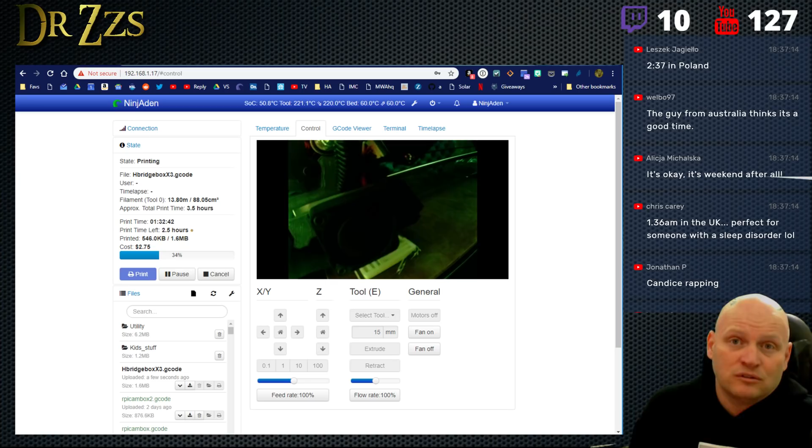Guy from Australia thinks it's a good time. Thank you, Welbo, I'm glad. Candace rapping, that's right, Jonathan knows. I got squirrels in my pants. Okay, it's a weekend after all. Alicja says yes, it is a weekend.

Wish I had the money to throw down on a 3D printer, so many ideas in my head. It's cool, man, it is so cool. I love it all the time.

So what I want to do today too is work on some 3D modeling, since that's been the theme of the last couple of days, everybody's been talking about 3D printers. We've talked about doing a stream about 3D modeling, and it almost doesn't matter what software you use, the principles are a lot the same. So I thought I could do that tonight. We'll start whenever the chat says it's time.

Literally, if you can imagine it, you can build it. That's right, Crazy Editor, it's awesome. So what I'm building here is, I've been working on shades. I got these geared motors, which I think are super cool, very useful, very strong, and yet they just run on 12 volts, and they're so slow you don't have to really vary the speed. You just turn them on and off because they're not very fast.

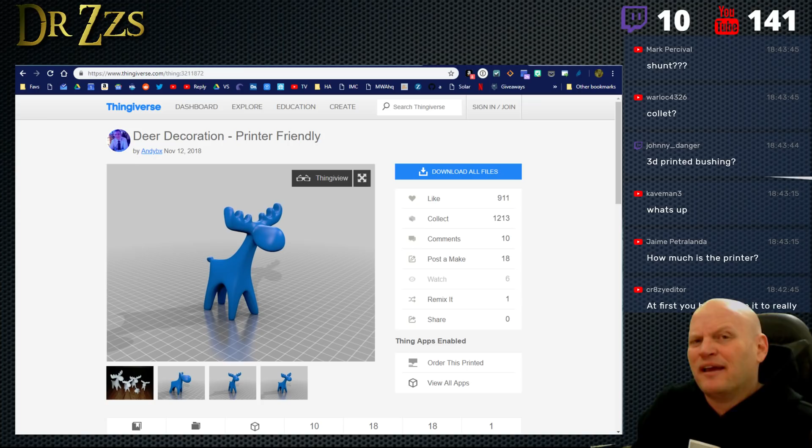How much is the printer? The one for the lottery is, I think, going to be like 170. I think 170, which is sort of a discount, it should be the best price you're going to get. But when we first looked, I think what I put in there first was the Pro, and that was like $230 or $250. Rudy said the best price was going to be like $230, and he asked what I thought about the prices. I said, well, I think that's kind of high, I still want it to be pretty low.

Oh, I wanted to say it. No— oh man, I didn't get to hear it. Thank you for the super chat, darn it, I should have turned up the volume. I'm so sorry, thank you for the super chat though, that was really awesome, appreciate that.

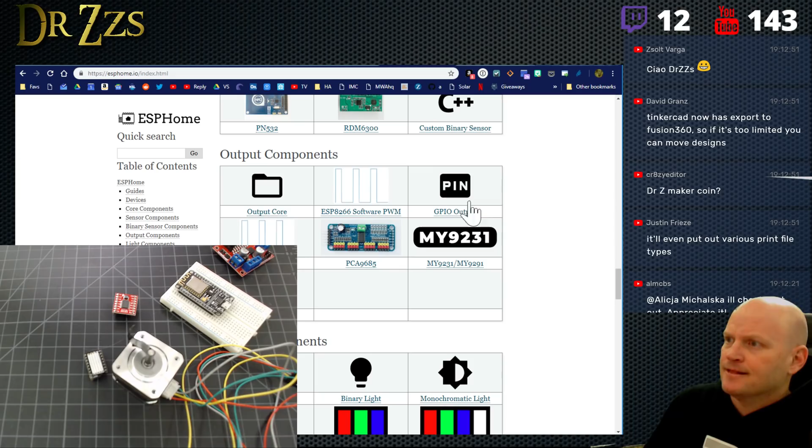So where are we at? Somewhere down here. Cover sensors, miscellaneous, so stepper. Yeah, okay, it's this one. The A4988 is the chip that's on this little guy right here. So ESP Home has a nice built-in back-end driver, Arduino stuff, so that you can run a stepper motor with one of these guys with ESP Home, pretty simply done. So maybe we can model out something for that.

You know what else I have? I know Hookup Rob's been talking about doing blinds, motorized blinds. Oh dear.

So I've got here some blinds. These came off of a door downstairs that we didn't want them on, so I brought them up here so I could start taking them apart and work on essentially putting this stepper in here. Oh, it's going to fit perfectly. Yeah, that's awesome, that'll be great. So maybe what we can work on modeling would be fitting this motor, I want some kind of a mount probably to put this motor in here, and a pulley on it, and some of those kinds of things. So let's put this over here.

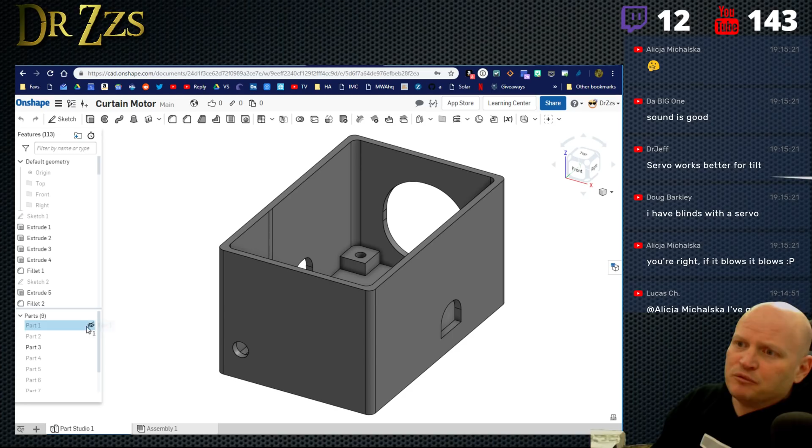Let's move this for a second again. So here's the parts that are included here. There's a few, some of them I'm not going to use, some of them I changed and made better. But if you wanted to print these out, maybe I put these holes for buttons, but your buttons are bigger, or you don't want buttons, you can find my sketch in Onshape, copy it, modify it, and print your own. So you don't have to worry about making it exactly like I have it.

The problem with things on Thingiverse is that what they give you is the STL file. Some will give you the ability to edit it another way, maybe a link to TinkerCad or something, but for the most part it's going to be an STL file. And editing STL files is nigh impossible, kind of a pain in the butt. You can do it with something like the Google one, SketchUp, but it doesn't work well. Google SketchUp takes your 3D model and breaks it into a bunch of lines, actual lines, in 3 dimensions, but just lines. It's no longer a shape that the computer can think about and model. Sorry, shouldn't have said that word, it's the C word around here. So anyways, I'm not sure about that. Okay, blah blah, sorry.

Yeah, servo works better for tilt. Yep, I have servos that I'll probably use for the tilt. But I want them to go up and down, so I need this to spin in one direction a bunch of times and be able to pull pretty hard, then spin the other direction so it'll let it back down again. So that's what I'm going to do.

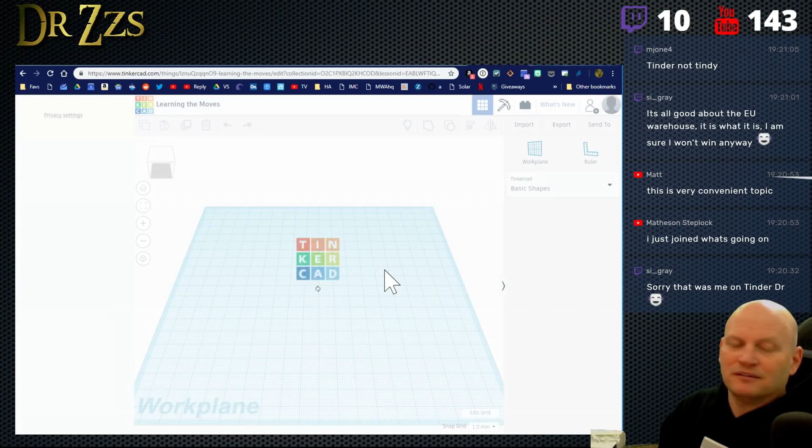Okay, let's go. I don't want to know, I don't want to know how to do anything, I just want to jump in. Just going to delete these things, whatever they are.

Okay, so let's start by saying, okay, what I'm going to need, I think, is going to be a holder for the motor. So the motor is going to fit in there, going to sit in there like that, and it's gonna twist, so it's going to have the tendency to want to do this, right?

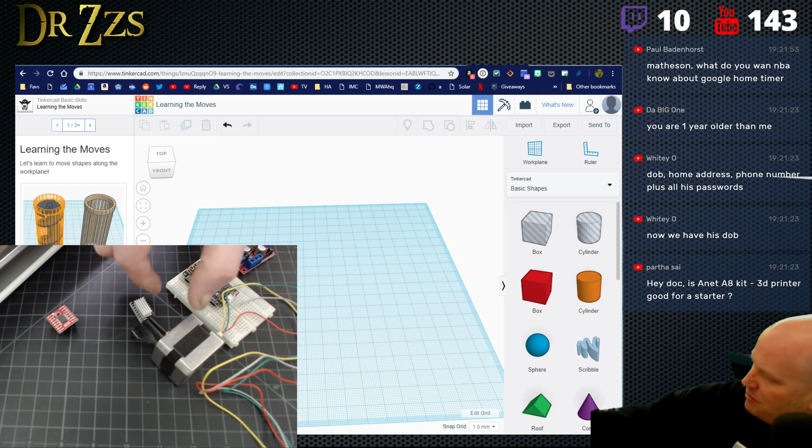So it's got some screw holes here, so that's good - I can put some, these look like M4 screws maybe. So I can put screws here, but what I'm going to want is probably something that will go between this and the front of the blinds here. So if I put that in like that, let's see if I can show you.

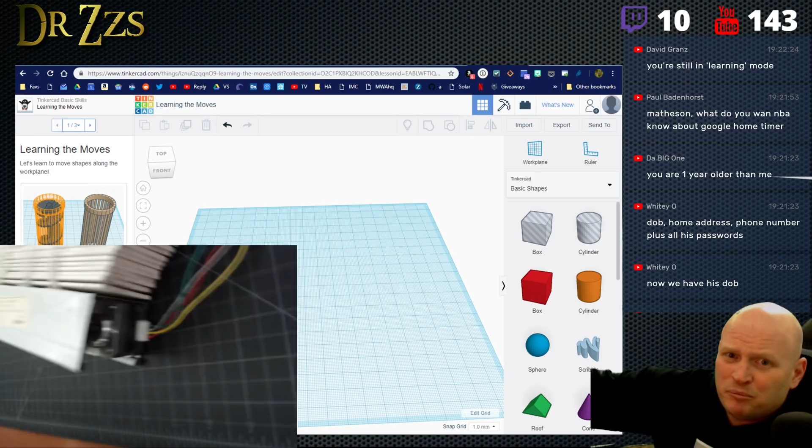So I'm going to put it in there, something like that. Okay, it'll be back a little further, but that's kind of how it's going to sit. So probably a couple things that I'm going to need to model.

One is going to be a pulley for the end, to put the string through and have it wind onto the pulley. The shaft doesn't have a flat side, so it'll just have to press fit really tight on there. Then I want to make something that goes from one side of this to the other, fits in there tight, so it'll have holes so I can put screws all the way through and use them to hold that down.

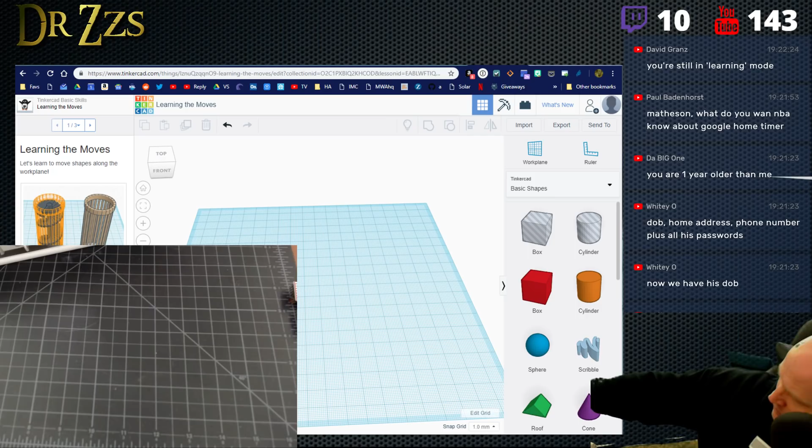The other thing I'm going to need is to put the D1 Mini and this motor controller in there.

Usually when I'm modeling, what I do is pick a plane. All right, I did that. Now I want to use - okay, this is already different. Congratulations, I'm done with the tutorial. Oh, that was all the lesson. Camera controls, look around, okay blah. It's making me do this. Gosh.

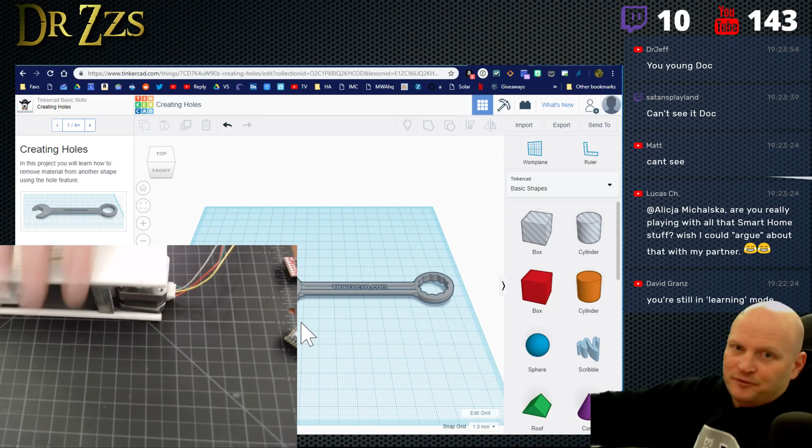Oh yeah, that's actually decent, you can see that. So this right here, there it is. Where you see my finger blocking, that's where the string comes up. And this little thing right here is the lock, so when you pull on it sideways to release it, that's the lock.

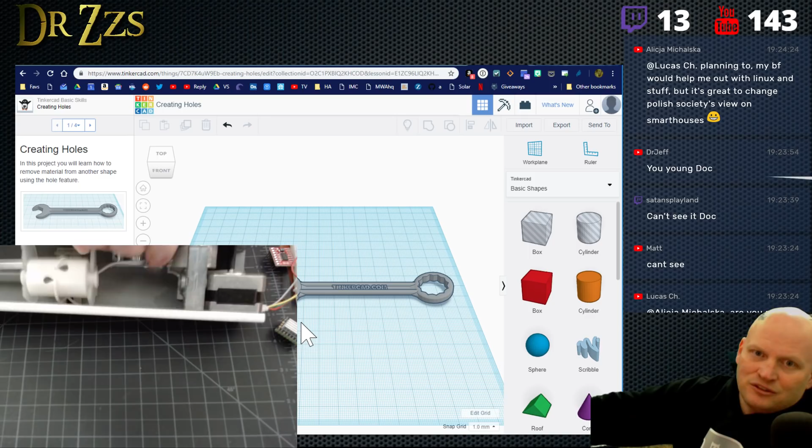So what I've got to do is take that lock out, and then this string that's coming across right here is going to be what wraps around the shaft of the motor. The motor is actually going to fit in right here. It doesn't fit this way - I'm going to have to take this bracket off and slide it in there, or shorten the shaft. I guess I could cut the shaft off, but I don't want to do that.

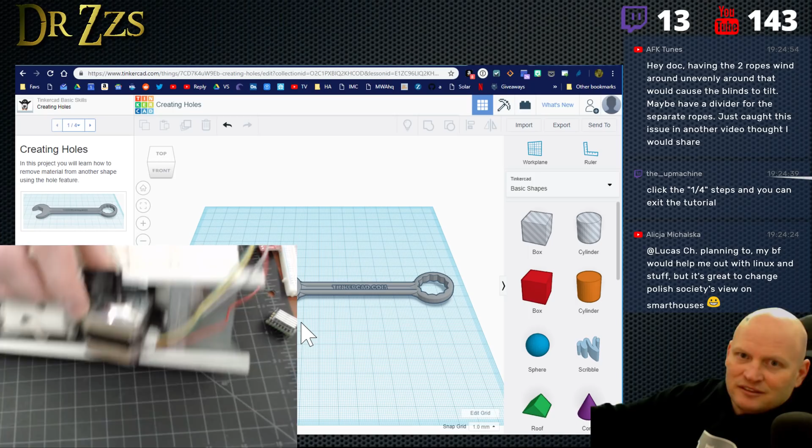But it's going to fit in right there. Come on, get closer, it's going to fit in there. Every time I do that it wants to go away. There we go, okay, so it's going to fit in like that, and then it'll spool around this shaft. And then I'll probably put the other parts over here.

So one thing maybe we can start with - oh yeah, that's a good idea, because that'll be easy - I'll build a cap for the end of this, and in that cap will be the motor controller and the D1 Mini. That'll be easy, and it'll give us a chance to try out Tinkercad.

What do you think? Blah blah blah. Yeah, copy, paste, scale. Okay. Should be paying attention to that, but I'm not.

Let's see - having the two ropes wind around unevenly would cause the blinds to tilt. Maybe have a divider for separate ropes. Just caught this issue in another video, thought I'd share. Oh, awesome, okay, perfect, that's great, thank you. But they can go at the same speed. Yeah, okay, that's great, oh I love it.

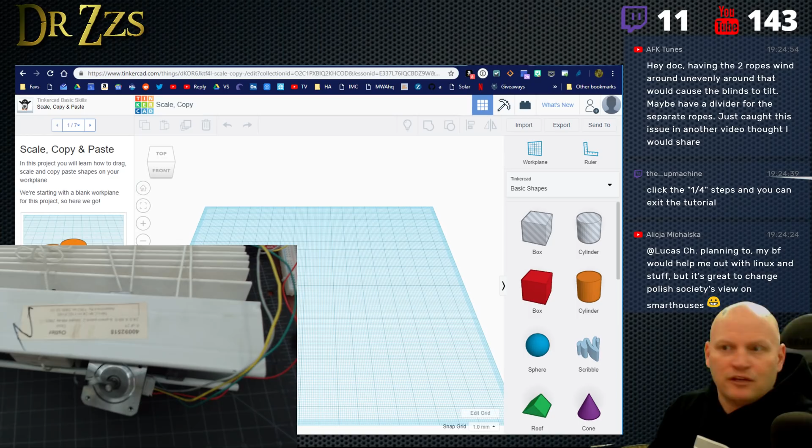Click the quarter steps and you can get - I can exit the tutorial. Exit. Oh good, because gosh it was going to take forever. Okay.

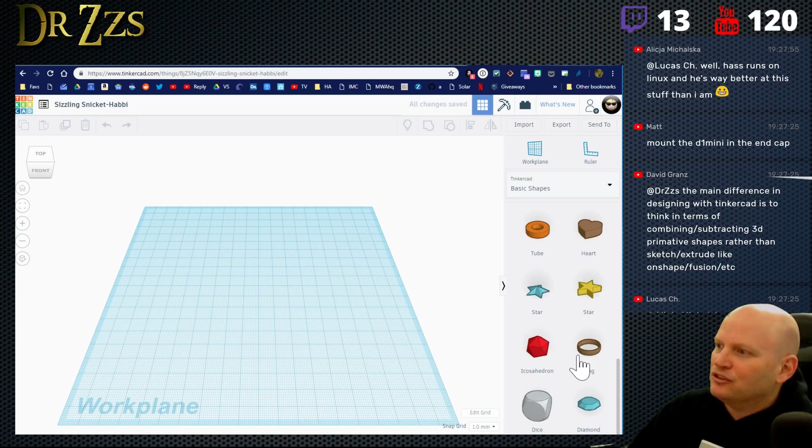Okay, create a new design. So what I'm used to doing, I guess this is interesting. So these, you start with a shape. That's different. What I usually did...

Interesting, okay, so I guess I'm going to want a box. Steps, length, height, width. Okay. Interesting. And then I guess I could probably cut out the box at some point. Group, ungroup, align, flip. Blocks and bricks? Really? You can make stuff out of Legos? Oh, that's cool. All right, so the other thing you're going to need if you're going to do 3D modeling is you're going to want calipers. I think this is like $10, maybe less.

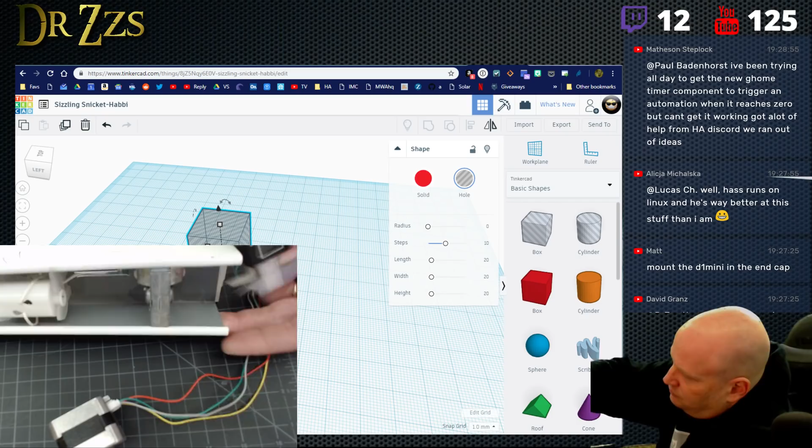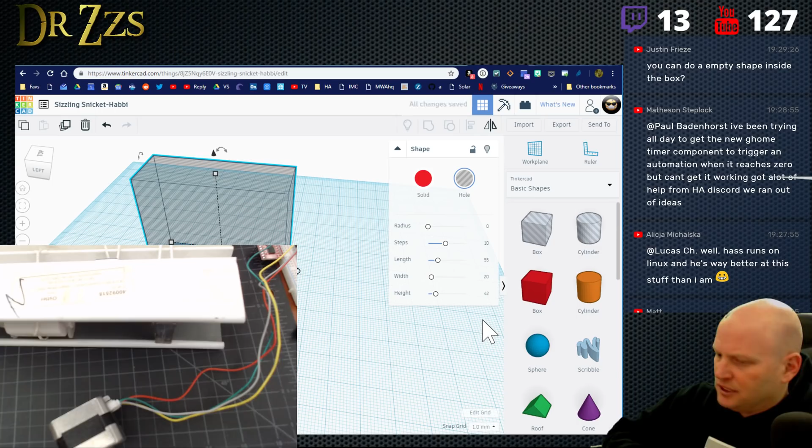So if I'm going to make this fit in the end of this, I got to measure that. All right, 56.72 millimeters, I'm going to say 55. So 55 that way. And then 43.8, so we're going to say 42. So we're going to go 55. And then height is going to be, what did I say, 42? Okay, and then 20 - 20 is probably actually deep enough. Let's see, because we'll have a D1 Mini with some headers. Yeah, 20 will be good. And then this guy with headers. Yeah, maybe we'll make it a little bit bigger. Let's go 30.

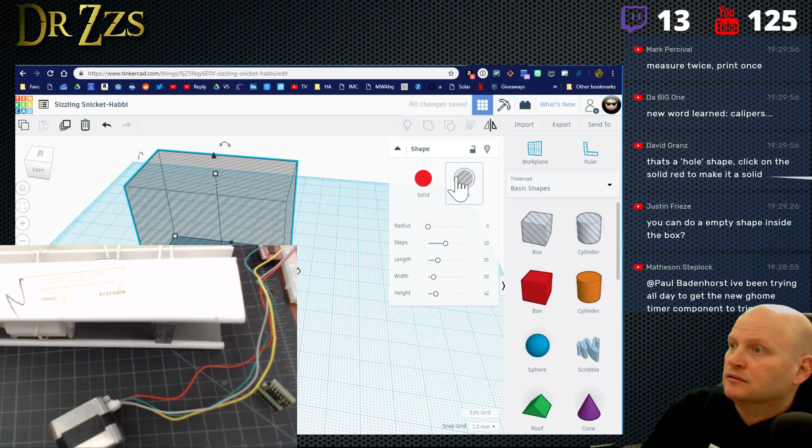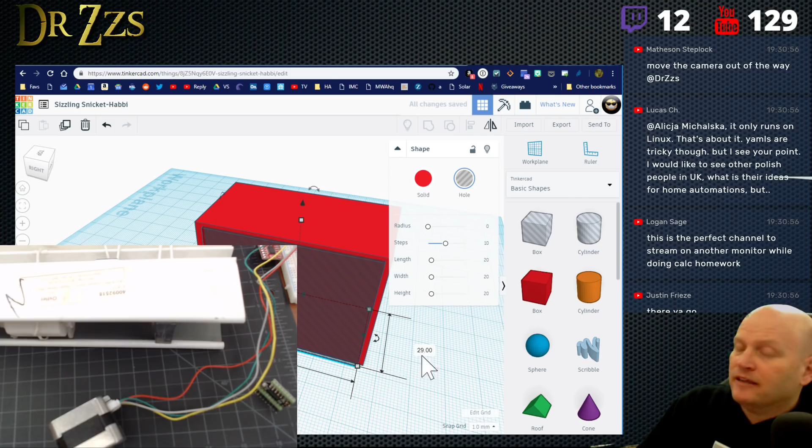Okay, we're going to make it a solid. All right, and now I'm guessing what I want to do is make a box here, and I want to cut out this other box, I guess. Okay, this is cool, I think I'm getting this. And then, oops. Okay, I'm digging it. Uh-oh. Oh, I see what's happening here. I want to go back. Okay, sidewalls are a little thick, make them a little thinner. I like that it snaps right to the - oh, you guys can't see, sorry, move the camera out of the way. Yeah, sorry, where'd my drink go?

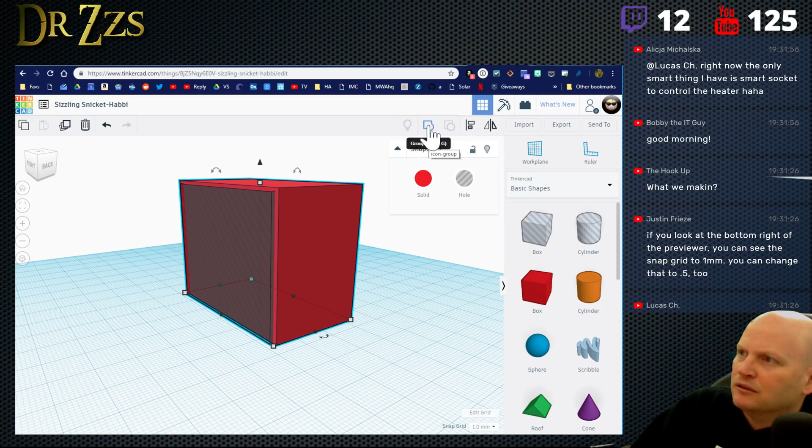You select multiple objects and combine. Okay, oh let's finish the depth part. I guess the depth, probably want it. Yeah. Okay, so then I make that a hole. Is that right? Stayed, okay good. Now I select multiple objects. Duplicate, copy, group, align, show all. No, cancel that, no, where's undo? Okay, workplane ruler, export, what's new?

Do I right click them?

Right now, the only smart thing I have in the house is a smart socket to control the heater. That's good, Alicja, that's fine.

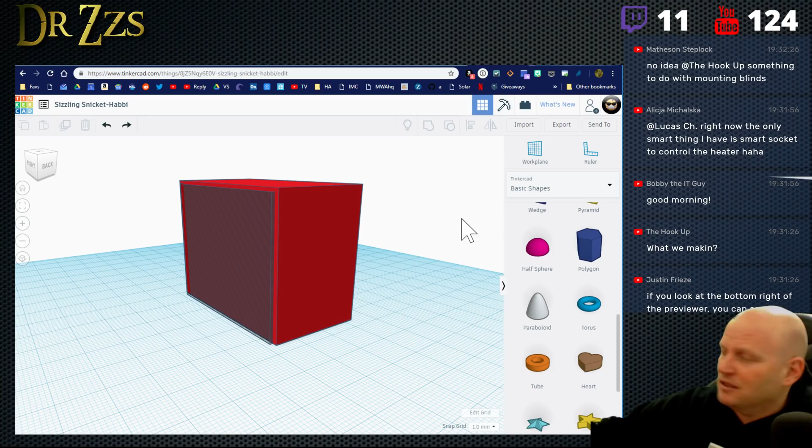You gotta start somewhere. What are we making? Hey Rob, how's it going? We're tinkering around. So you were talking about blinds. I'm working on blinds. This is gonna be - oh, I'm putting it in front of the camera, it's not turned on. But what we're really talking about is a lot of 3D printing stuff. A lot of 3D printing stuff. A lot of talk lately with the giveaway and such.

So this is me learning TinkerCad, which I've never used before. I want this to go up, I don't want it to sit flat on the bottom, I want it to go up. Is that steps maybe? No.

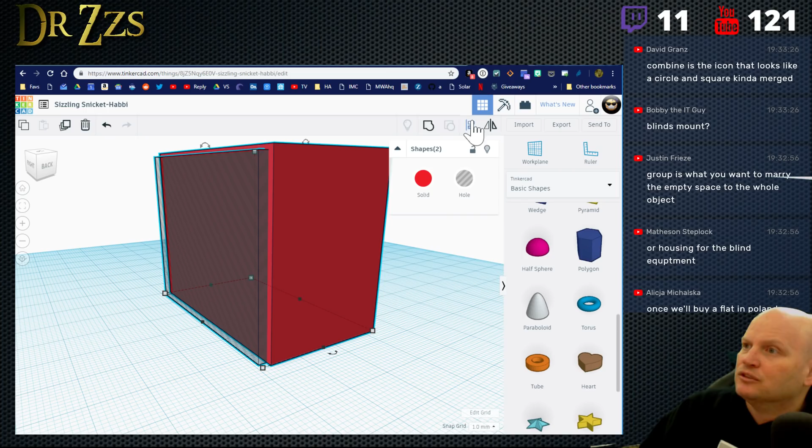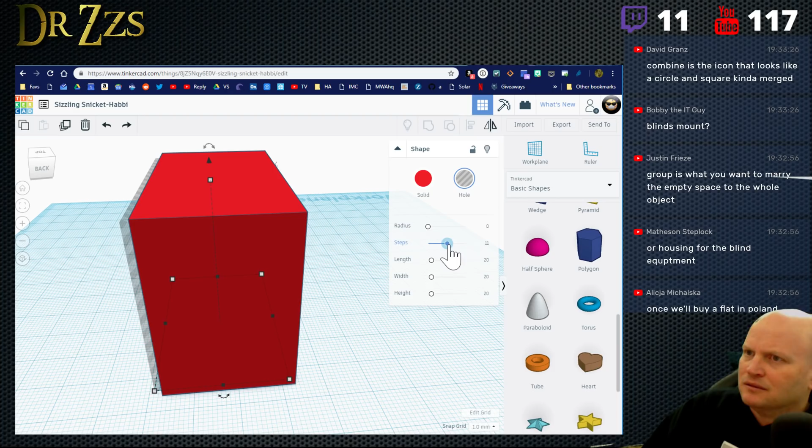Because if I delete it from the inside, if I right click - no, right click. Combine is the icon that looks like a circle, the square kind of, this one. Ah, very good, thank you, that was easy. Except this - see the bottom, there's nothing on the bottom. So I'm going to back up, I got to figure out how to get this up in the air. Radius, steps, length, width, height - what does that do? Oh, I saw it, I saw the arrow that I want, it's up at the top. There, this one. Oh yeah, oh yeah, very good.

Okay, I'm digging this, this has got some good features definitely. I could see this being pretty easy for new users, right? Because you're actually modeling it, you're almost holding it in your hand kind of thing. Okay, and now I can select them both and then hit this, and it will take the hole out. Okay cool, very nice, okay, very nice.

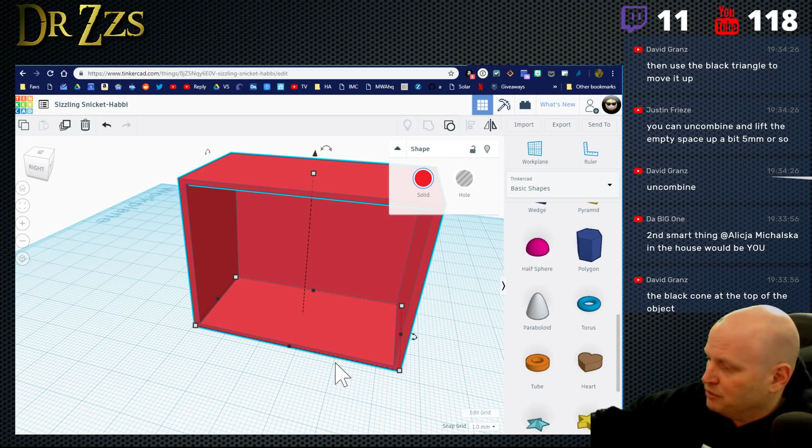All right, now I want to be able to mount the - let's see, well you know what, I'm going to need a hole for wires, so let's put a hole for wires in there. Tube, cylinder, let's do a cylinder. And there, we're going to rotate it this way. Okay, I like this, this is easy. I'm going to shrink it down - it's just going to fit wires through, so we'll make it 5, a little small, we'll make it 6. And then this way, 6, okay. And then, oops...

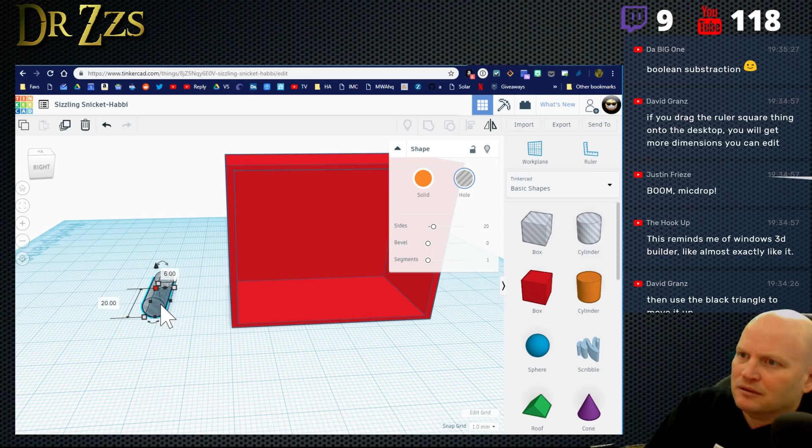6. And then I want to move it though, like in space. I want to move it. There, no, there, no, no. Once I set it here, am I stuck? Boolean subtraction - if you drag the ruler square thing onto the desktop, you get more dimensions.

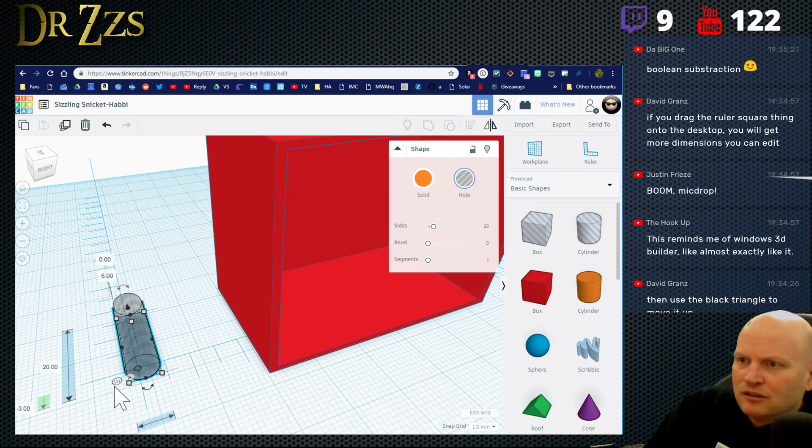Oh, yes you do. Nice. What does this say? Use midpoint. Oh, okay good, so it gives you kind of snaps. Oh that's what that is. Okay cool, I want to move the whole bloomin' thing, the bloomin' onion. Okay, I can move it up in the air. That's good. There's got to be another arrow like that that goes the other direction.

Oh wait, do I rotate it? Yeah, that's probably what I have to do. I'm going to rotate it. And then that arrow - oh, I thought the arrow would go to the other side. How do I move it to the other side? Oh, here we go, this way. Oops, this one. No, this one. No.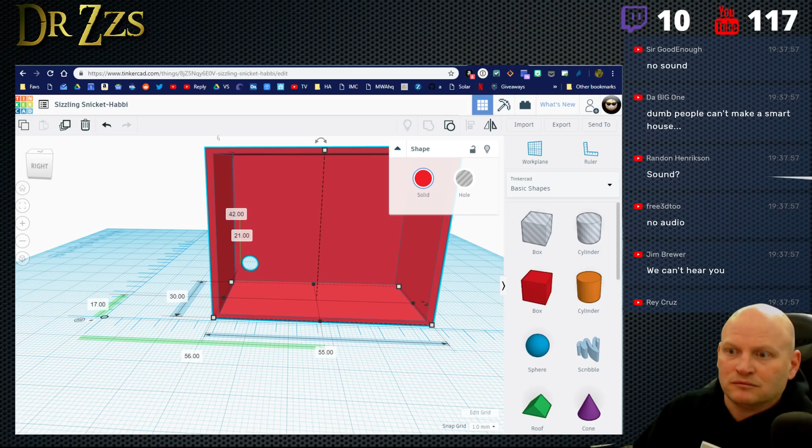How about now? No sound, no sound. Dumb people can't make a smart house. That's me. All right, how long had you lost audio? Because I revealed the secret of life, and I'm sorry you missed it.

Reminds me of Windows 3D Builder. Almost exactly like it, is that right? Maybe what they did was buy it back when it was there.

Super simple, so let me show you for comparison now. Let's do the same thing, let's do it in Onshape. And I think, honestly, now that I've used that a little bit, I think for a new user, TinkerCad - I think I'd probably recommend TinkerCad.

So we're going to make a new document here. We're going to call it blinds cap. Okay.

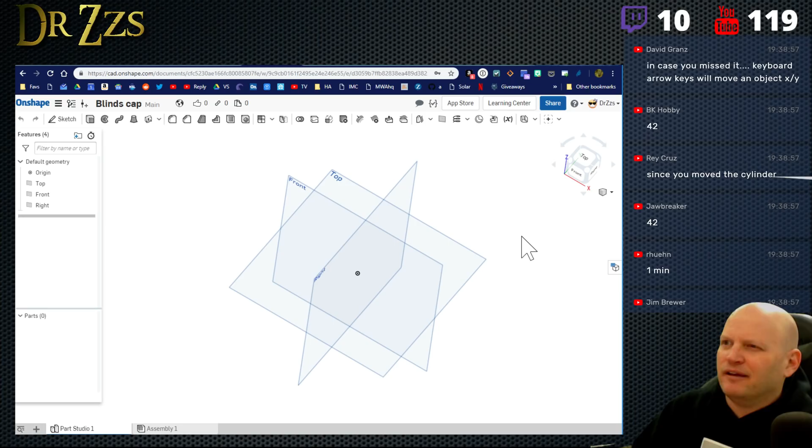So the way this works, and this is at least the way I did things in Fusion 360, you start out with a sketch, which is going to be a 2D, two-dimensional drawing. So I'm going to start out with a sketch, and the sketch is just going to be a basic shape. In this case, I'm going to do a center point rectangle, so I'm going to pick this rectangle and then stretch it out to whatever I want it to be. And then what did I say it was, like 55 by 42, I think I said, right? 55 by 42, okay great. And then that's the outside.

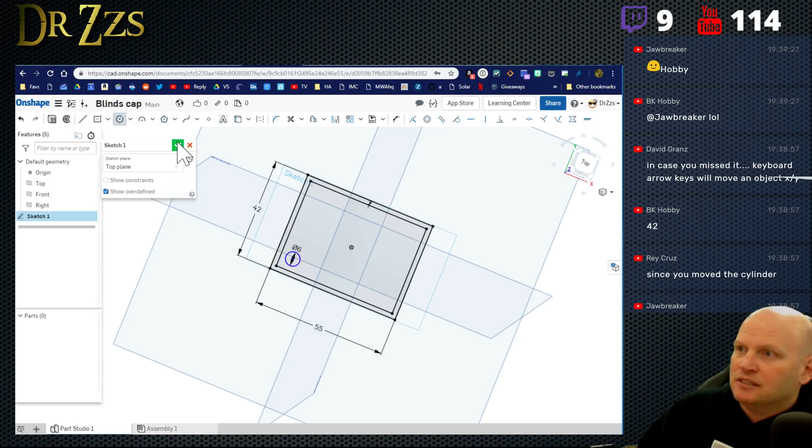So then I want the inside, I want to come in. So I'm going to grab this offset, and I'm going to come in off the offset maybe 2 millimeters. Makes a good thick, good size wall, 2 millimeter wall on the part. Okay, so I come in that far in that. And then I want to put the circle - this doesn't have to be exact, so I'm just going to put a circle right about there. And I'm going to give the circle a 6 millimeter diameter. Okay, done.

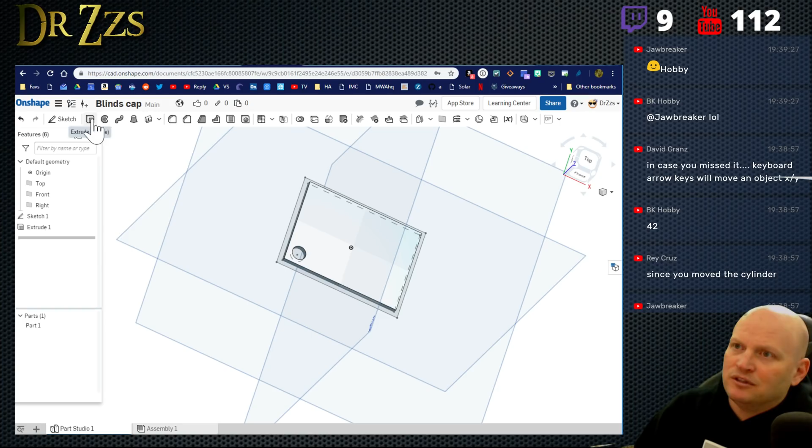Now I'm going to do a couple things. Now I'm going to extrude - extrude means you build it up from flat, so it was 2-dimensional, we're going to make it 3-dimensional. So first we're going to extrude this bottom part, and we're going to make the bottom part also 2 millimeters. Great. Now when you do that, the sketch will disappear, so you have to come over here and turn the sketch back on so you can see it. And then we're going to do another extrude here. And how big did we make that thing? I don't remember what it was. 20? We'll say 25, 25 sounds fine.

So then you extrude it out that way, and you've got some choices here. You can make it new, which would make it a separate part - so this would be one part, this would be a separate part. Or you add it, which is what I want to do. Or in the case of things that overlap, you can remove and erase part of it, like we did with that other box - we removed the box from the inside of the other box. Or you can intersect, where it keeps just the parts where they overlap. In this case, these parts don't overlap, so I can't remove or intersect anything. I'm just going to add it to the regular part.

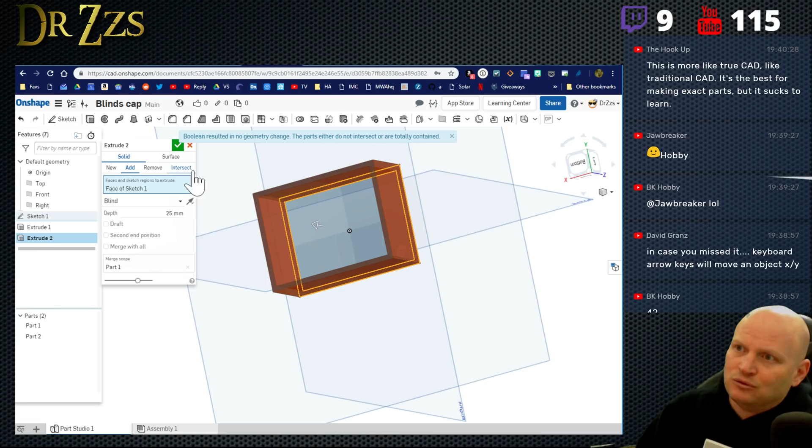Now what's it doing? Now I got it all, now it's all pissed off. Oh, because it's going the wrong direction. There it goes, now it's going the right direction. So this arrow was going that way, and this part stops right here at this line, so it says you can't add it. They don't actually connect other than at this like single point line, so you got to flip it this way.

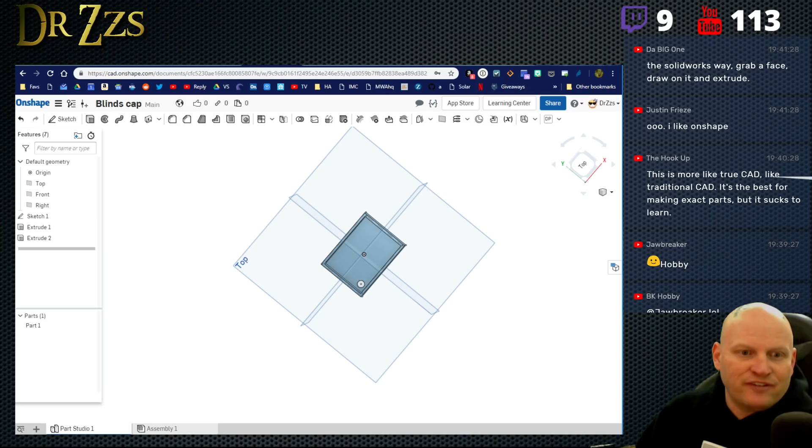Okay, so there you go. That's the same box. That was fast, but that's because I know how to do this a bit better. There's a lot of fumbling around, but the SolidWorks way is: grab a face, draw on it, and extrude. That's how I do Onshape - there may be other ways, but that's how I do it. I like thinking that way. Once you start thinking that way, it makes it pretty easy to make things.

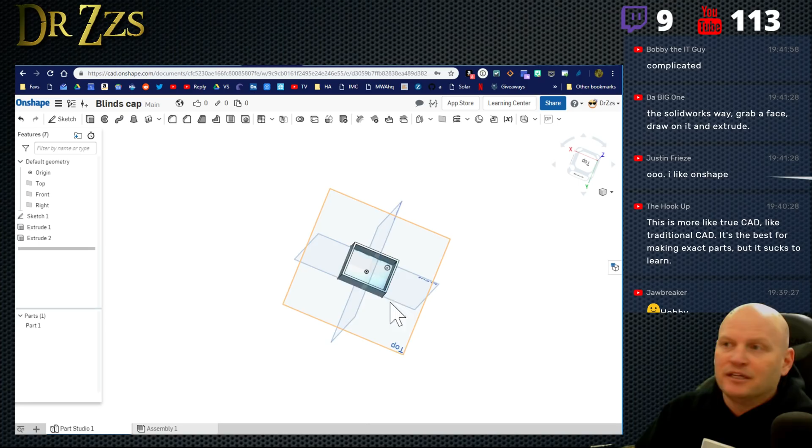This is more like true CAD, traditional CAD, the best for making exact parts, but it sucks to learn. You mean this, Onshape, this thing here? It's hard to learn, I would think. I started doing this kind of stuff in high school.

Does that seem complicated to you, Bobby? Which seems better to you? Probably TinkerCAD. What you need to do is get something in mind and start playing with it, and as soon as you can't figure something out, come ask us and we'll help. The main difference is designing with TinkerCAD is thinking in terms of combining and subtracting 3D primitive shapes, rather than sketch-extrude like Onshape, Fusion, etc. That's what I'm gathering, Dave. So here's something.

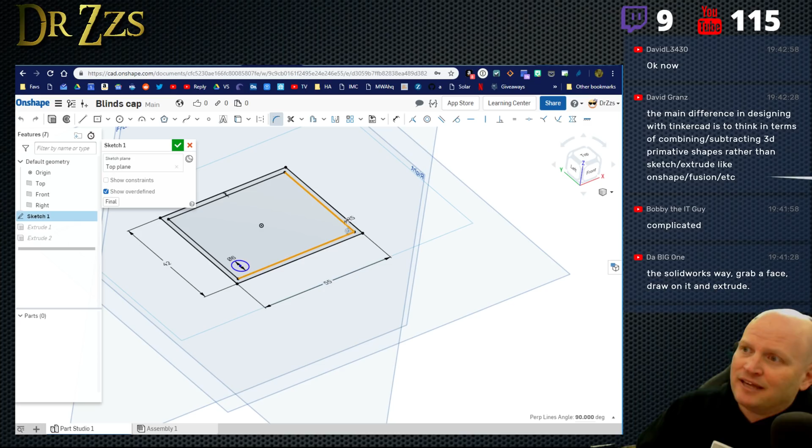Let's do this next piece, because I like to have rounded corners on things. So I want to round the corners. There's a couple ways you can do it in Onshape - you can either go to the sketch and add a fillet to the corners, like that, a 5 millimeter radius fillet. So I could do that. But what I do instead is, once it's already a 3D part, you can fillet it as a solid part, and that just makes it look nice.

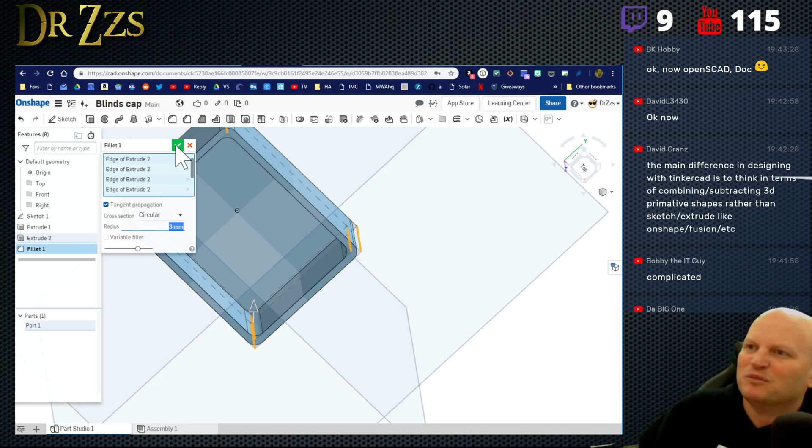Grab that edge, and that - just grab all the edges you want to fillet. We'll fillet the insides as well, make it a 3 millimeter radius. Actually, the inside should probably be a little different to make it true, but whatever, we'll leave it. Okay, so that's how you do it in Onshape.

Now let's go back here - how would you do that in this? Have you seen that 3D printing YouTube dude's video on fillets? I don't think so. Is it funny or is it just really good? Does he talk about how to do it?

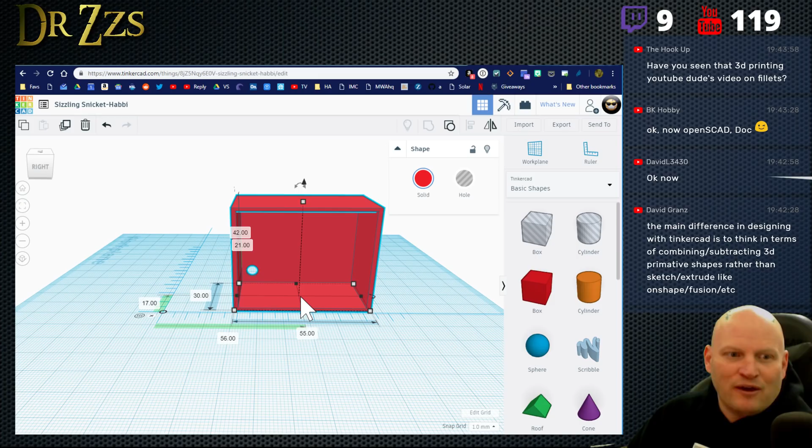Now OpenSCAD. So here's the thing - now how do I make that? How do I make a fillet here? Do I make a tube? I put a tube somewhere.

Rounded corners make the print stronger too, that's right, Da BIG One - that's why we do it. I was talking to a friend who was 3D printing new parts for the RC car he gave his son for his birthday, and we had that exact discussion, because they'd designed the car so that these frame axle joint pieces had square corners, and as soon as you hit something it just snapped. He said if you'd just put an edge on it, a fillet or chamfer, to give it some strength, it would've been fine.

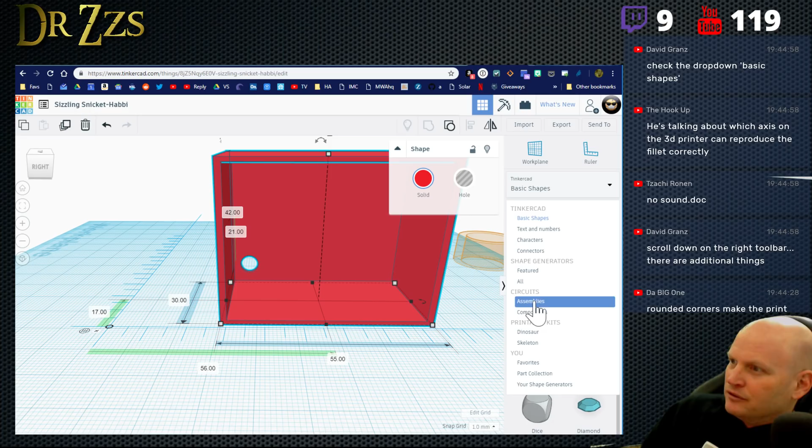Drop down, basic shapes - oh, okay. Connectors, okay. Shape generators, assemblies, components - whoa. Uh-oh. Text and numbers, characters - so is it connectors?

Oh, these are cool, I like this. Oh, spinning hub - no. Oh you see these - this is great that they already have these designs. So in Onshape, you'd either have to go steal somebody else's model, or draw it up yourself. This is pretty nice that they've got these parts already modeled up for you.

So it must not be connectors. Where is it - basic shapes, not text and numbers probably. No. Characters - oh, that's cool, back. That's... with the stream delay, right? Who knows - skeleton, dinosaurs, printable kits. Oh that's cool - assemblies, components, favorites, part collection, shape generators.

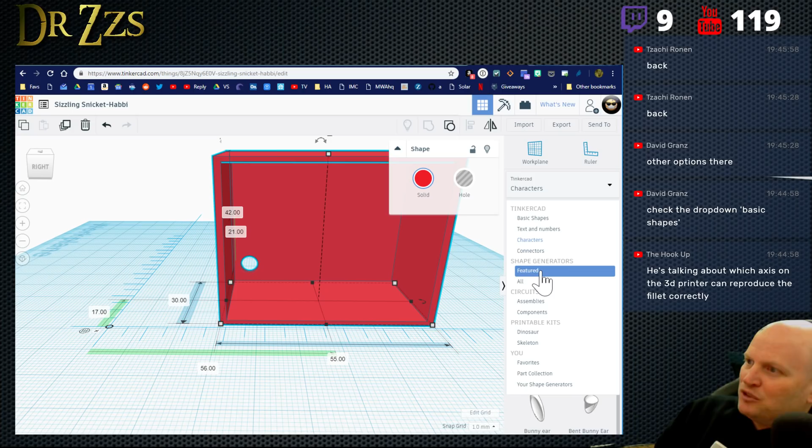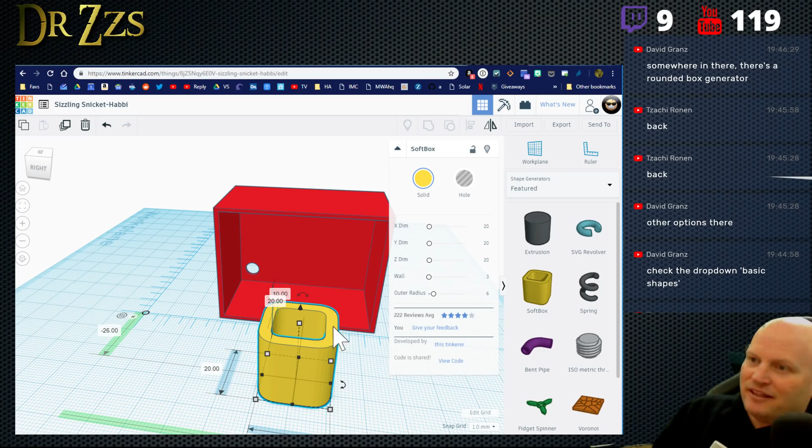Okay, good - extrusions. Oh, a soft box. Oh, I should have just made a soft box - that's what I would have done. Let's just slide a soft box over here. Yeah, look at that. That's what we need - somewhere in there there's a rounded box generator. Yeah, that's this right here, right David? That's this soft box.

Oh, and it's got screw threads, I like this. A fidget spinner. Custom font - oh, this is cool. Okay, this is good, I like it. Oh, and this one's got a lid on it.

Oh, that's nice. Wow. Okay. Well, this is definitely going to be something I'm going to have to play with because there are some options here that make things fast and easy.

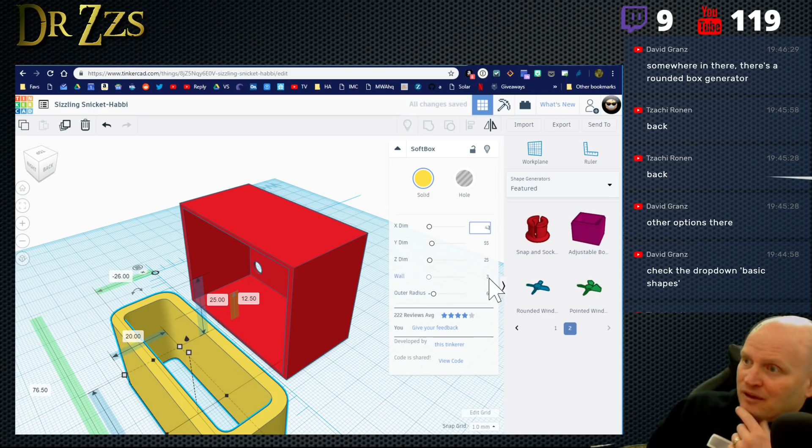So in this case, what we would want is we'll do the same X dimension. One of them, Z, was going to be 25. This one was going to be 42. The wall width was 2, and the radius was 3. Dude, I love it. Look at that.

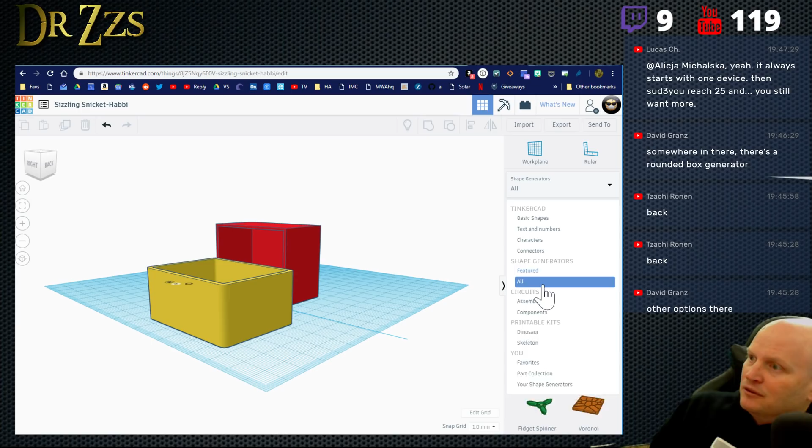Okay, now I need to put a bottom in it. How would I put a bottom in it? Probably go back to the all shape generators. Oh no. Extrude Australia, extrude the UK.

Easy to go down the rabbit hole. Yeah, here we are, in the rabbit hole. I enjoy this, this is a fun thing to do. Like I've spent times when I should have been doing something else, like editing videos or something. I've spent just sitting here modeling things.

You can see all the stuff in my Onshape folder here. So I made all those curtain motor parts, the Pi Zero camera parts. I was making, the kids are doing Aladdin for the school play, and so I was doing some Jafar broomstick stuff. I made some drawer hangers for my keyboard, a headphone holder, mic stand brace. I made a teleprompter, Roku thing, a hole for the... these are all just things I've made, and you can go back for a couple years probably and find stuff in here that I've been messing with.

So this was my air conditioner. I made an air conditioner out of a mug. So a lot of cool stuff. Oh yes, and this was when it was fidget spinner time. Yeah, this was part of what I tried to do a patent on that got kiboshed, mostly because I did it here. So this was the play two years ago when it was Wizard of Oz. It's a tool rack I still use. Anyways, lots of fun stuff.

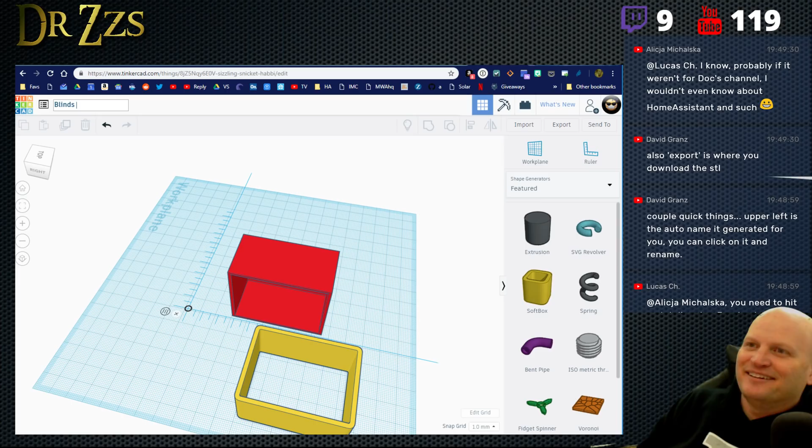Blinds cap. And then, ooh, what's this? This is my design. Oh, okay. Tinker this. Oh, that's how you play with it? Okay.

And then you can import. So you can import STLs here, huh? I don't have any on this computer, I don't think. I'd probably do somewhere if I looked. Export as an STL, an object, or an SVG. Okay, cool.

Or you can send it to these. Send to my printer. Okay, cool. Do they have an Octoprint plugin? That'd be awesome. Reengineered my shower drain to drain quicker.

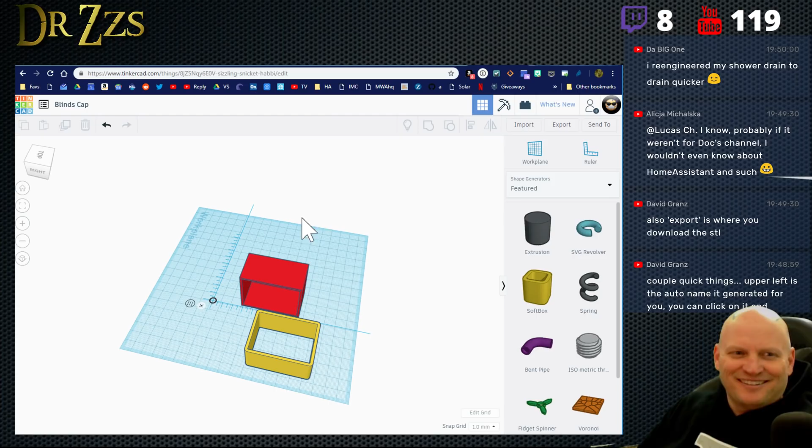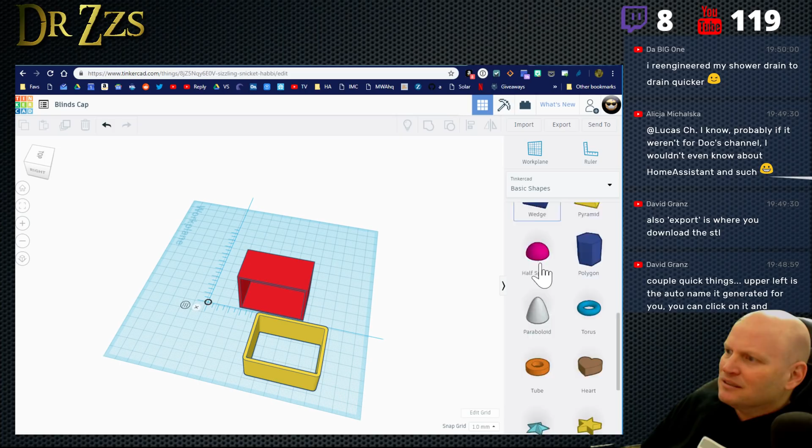All right, so I think what I would probably do is go back to the basic shapes, and I would make a box. This is just how I think. It's probably not the fastest way, but I'd make another box, and then I would just make it fit in here. So I would squash it down till it was 2 millimeters. Is that what that is? Can't tell. Yep, looks like it. 2 millimeters. And then I'd stretch it out until it was the right size here.

Doesn't want to snap right to it, does it? 43. Yeah, it does, 42. Okay, and then drag it this way. Oh, no, it looks like I went below it. Oh, and then this wouldn't do my soft corners. Yeah, this is not the right way to do this. Don't do it this way. Lift it up.

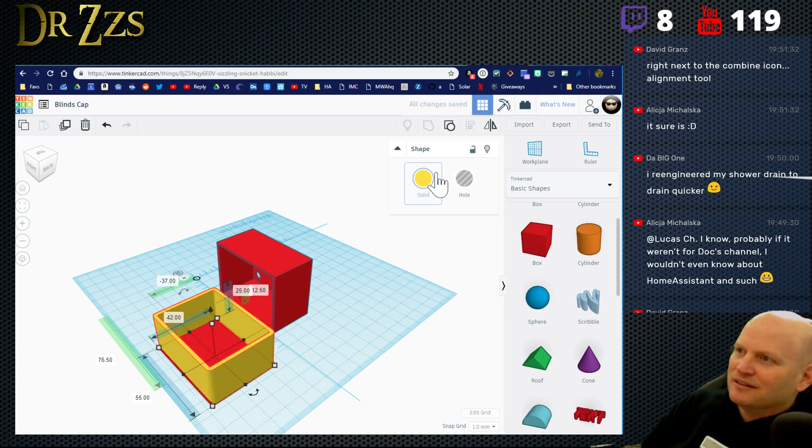Okay, and then I would combine these. That's my hack way to do it. There you go. What did it do with the corners? Yeah, it left the corners in. So I figured that out.

Combine icon alignment tool. Oh! Ooh, so let's try that. Yeah, let's go back up. And we'll do alignment. Align. Oh, cool. What do those do? Is that those black dots? What does that mean? Oh, I double click them and it lines them up. Oh, dude. I don't want that one though.

Oh, there's some of them unaligned when you line them up. This is kind of fun, just playing around. Snap to grid options. That's just wrong.

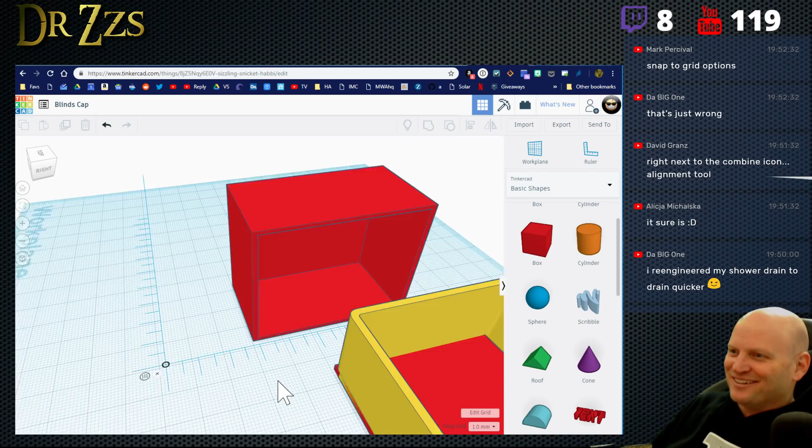It's a horrible way to model, isn't it? Cool.

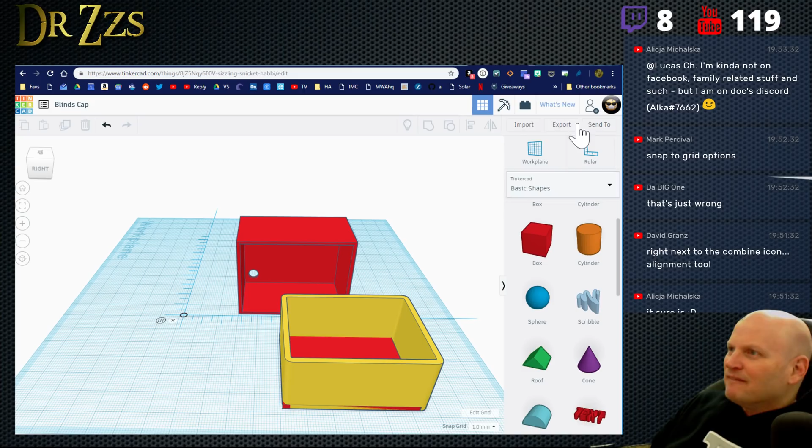Saving my work. Oh, okay. Yeah.

So the other things I would want to do would be to make, I want a slot. I want a couple slots so that this has some place to sit so that it'll kind of be held in place. What I found works well, what I did on my other print for the blinds, was I kind of just made a little slot. So to do that here, I'd kind of just do this.

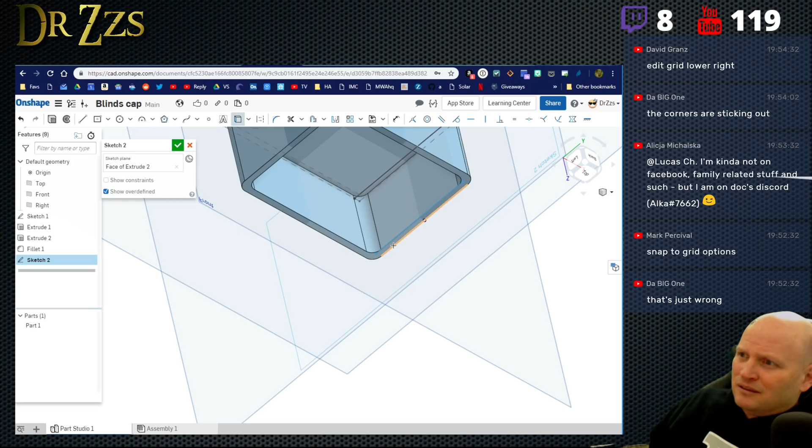Oh, and then an important thing here. So I made a sketch here, and then I'm going to grab these existing edges, so I'm going to grab that edge and make them part of this model. Now I can make this part go away so I don't have to look at it. I can make that sketch go away so I don't have to look at it. And then I can just click that, but I want to think about it this way.

All right, so now I want to extend this to there. Okay, and then I'm going to hit L and just draw a line between these two. Okay, let's think how I want to do this. I want to have, let's see, I want the Wi-Fi chip to face out, so I want it to be like that. So I'm going to come in, say, let's see how far up does that thing stick up.

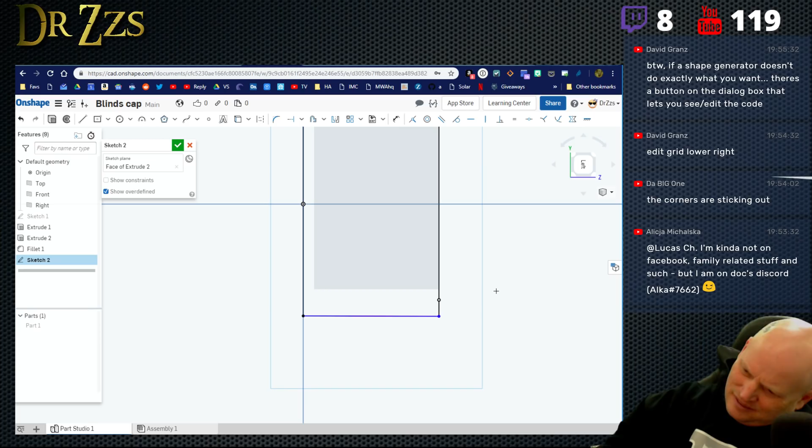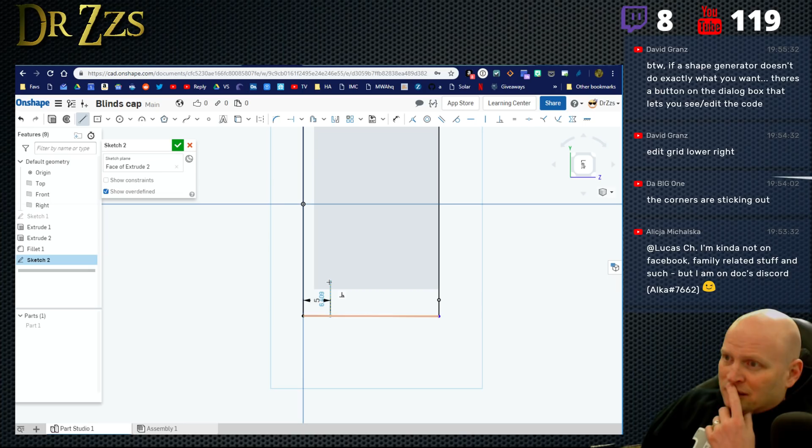I'm going to come in, say, 3 millimeters. From the back wall, let's see, where's my part again? Yeah, that is the back wall, that's the outside wall. So I'm going to come in 2, and then 5. So this is how I do it - I make a line, come in 5 millimeters, and then come up, 2 and 3. Yeah, that'll work, so I'm going to come up 5. And then I'll make a line from here to here.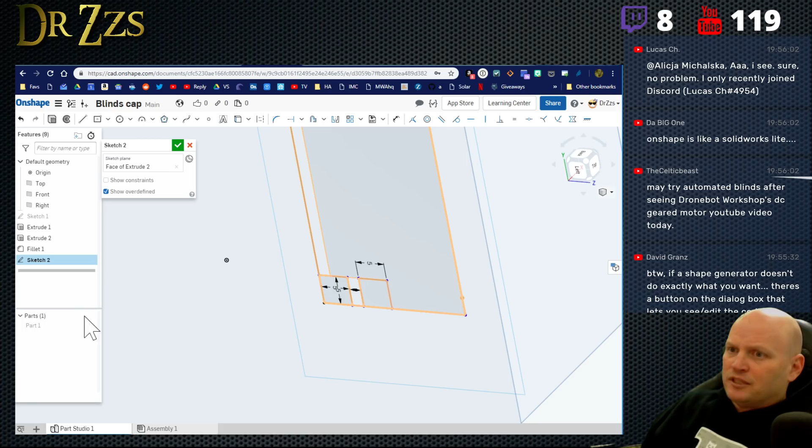Okay, and then I'm going to leave a gap there, and then do the same thing. I'm going to leave a gap of 2. And then I'll go up, and then I'll go over, and then I'll go back down. It's funny, why is it an odd number? It's interesting. All right, and then once I put this part back in, what I'm going to do is then extrude these parts.

I should put them on the other side, but that's fine. So now again I'll extrude these parts and pull them out. Let's see how wide is this thing. Pull them out - 25, again, okay so it's already set to 25. So great, 25, done. Now my D1 Mini is going to sit in that slot with the pins pointing out this way, so that's going to leave me the space over here to mount this guy.

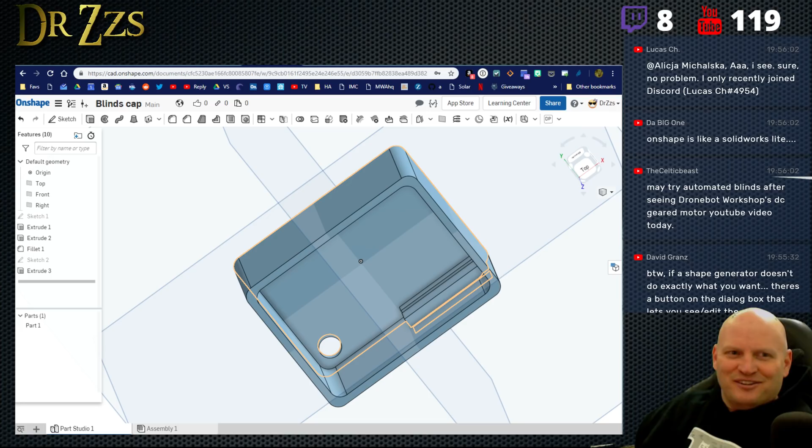But I think what we'll do is call it good. You guys, what do you guys think about that so far? Because I'm tired and it's going to be family coming home real soon here.

May try automated blinds after seeing DroneBot Workshop's DC geared motor YouTube video today.

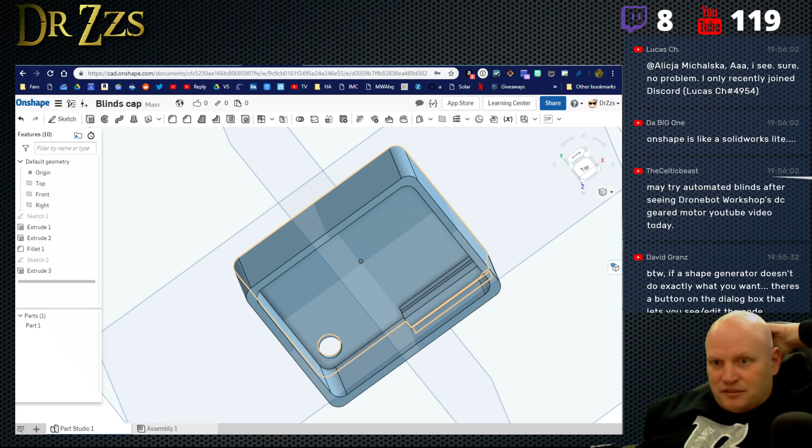Ooh, I haven't seen that. Did he really just do... that's the one I'm gonna do. Mine aren't blinds, I'm doing shades for what it's worth. Oh, what? No. Controlling. Hey. It's all right, it's okay that there's nothing new under the sun.

Skip ads. Yeah, this is the same thing. Oh man, I guess the difference is... oh, that's good, he's good. I need to be watching this guy. But yeah, that's almost exactly it - it's a different motor controller, but it's a similar chip that it's based on. And instead of an Arduino, I'm using the D1 Mini.

It's interesting, he's got the joystick there. I do have a couple buttons for some control. Very cool. And so he did these with blinds? Oh no, he's doing a robot.

Cool, I like his stuff. All right, subscribing. I probably already am subscribed on my other one.

Still having a stream tomorrow? I am not, Satan's Playland. I will be at work, helping relieve labor pains all day tomorrow and all night. So I wanted to get on today and do something.

I wanted to get on today and talk about the Banggood lottery thing, which we did. And then I thought we would do a little bit of CAD and talking about some 3D print stuff, which we did.

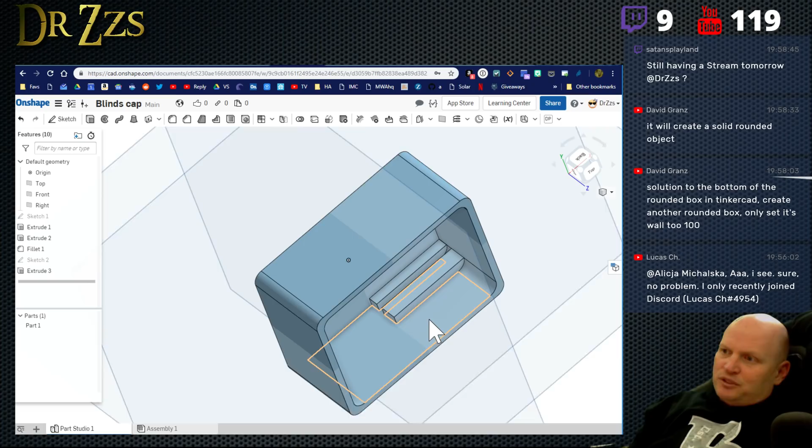Actually, you know what, this doesn't need to be that wide. Why is it that wide? Oh, you can click on this. When you want to see the dimension of something, you just click on it, and then it's over here. It's 5 millimeters wide. I don't think it needs to be that wide.

So what I'm going to do is go into that sketch, and instead of 5, I'm just going to make that 3.

Take a few less minutes to print now. His vids are cool, they do look cool.

It will create a solid rounded object. Okay, good. Solution to the bottom of the rounded box in TinkerCAD. Create another rounded box, only set its wall to 100. Oh, very good, very good.

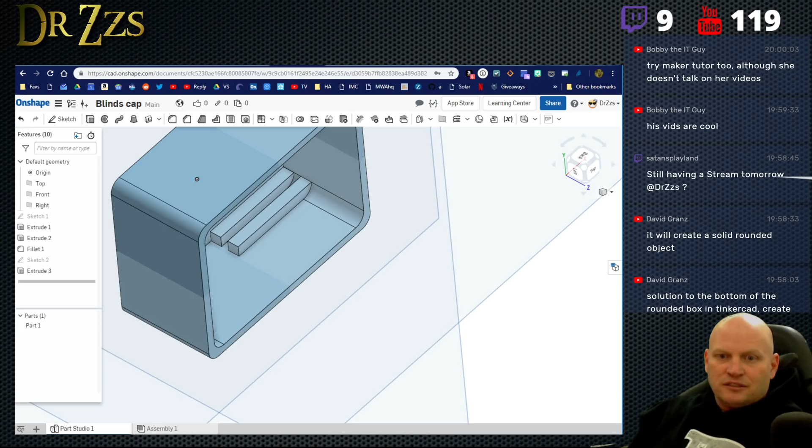Try Maker Tutor too, although she doesn't talk in her videos. Really? You know, I think there's a lot of...

It's too bad English is such a crappy language. It's too bad that it's become universal. We don't really have one language that we all speak well. I feel bad, I see people do videos and they obviously have supreme intelligence and they have a great idea and a plan and they're teaching something, but they're not confident, at least in their English, and so they don't talk. And they try and just show you, or they put text on the screen and stuff, and those are just hard to watch.

I was thinking about videos the other day, because every once in a while I do that, and I was thinking about how important the audio is in videos. Because if you think about it, if you were trying to watch a YouTube video or a movie or a TV show with no sound, you wouldn't watch it very long. So even though we think of videos as being very visual, they're at least only half visual, right?

You can try this. Instead of watching a video, just listen to it. I've, and you guys have probably done this too. We all have kids probably. So taking cross-country trips, you got kids in the back watching a movie. I can't see the movie, but I can hear it. But I'm following the whole story, right? And enjoying it just by hearing it.

So I would even venture to say that in something like YouTube, the video part is really not the majority of the important part. The important part, the more important part, and certainly the crucial part not to forget, is the audio. Well, except Charlie Chaplin. Fine, but they didn't have the choice. And look how hard he had to work to make just the visual part worthwhile.

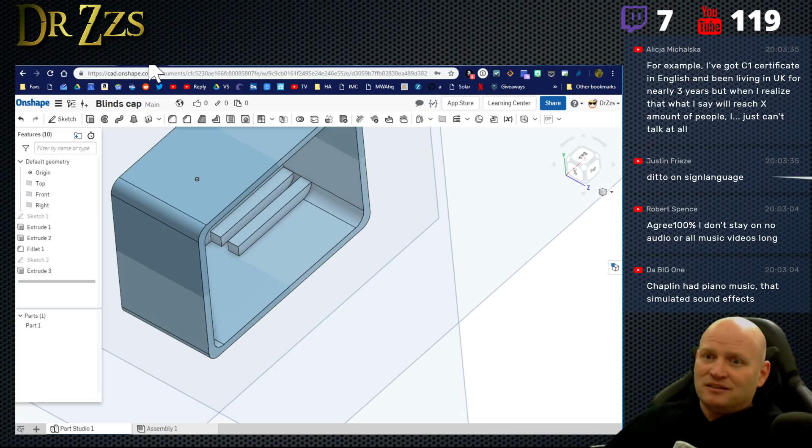Thank you, Kenner, you love my vids, I appreciate that. It's amazing how much time I spend doing this, and it's because I enjoy it. These are things I would be doing anyways, and doing videos about it, doing live streams about it is easy and fun, and it's nice to interact. I like that a lot, obviously it's much easier.

Wait, oh, those stuck out the bottom. Curses. They weren't quite lined up, that's why they stuck out the bottom like that. I'd have to fix that. All right, her vids are good.

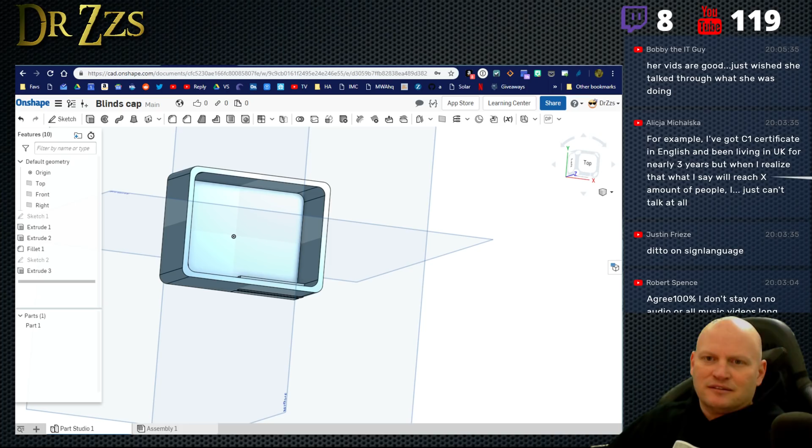Just wish she talked through what she was doing. Even if it's not great English, it's okay. Look at the guy with the Swiss accent, right? He got a lot of grief early on when it was hard, when people didn't understand him and stuff, but he kept at it and he does a great job. Now he's an icon in that community, in our community. He used to do community audio, radio. Explaining physical things in audio is not an easy task.

That's for sure. So the reason I was really thinking about it is because the last video I did, the Picroft video, I did mostly audio, right? I didn't sit in front of the camera and do the floating head thing very much. And part of that was because of my schedule. It's hard, I could do it instead of this, I suppose, but instead of sitting down in front of a camera and talking, it's hard to look at the camera and say what I've already written that I want to say.

That's why I made the teleprompter, and that worked okay, but I can't always do that. And it's hard to make sure I'm making eye contact with the camera. But it's easy to write out the script and read it into a microphone and then just put stuff with it. So that's how the next video, the one about the shades, the motorized shades, is going to be like that as well.

So give me feedback on it. If you think it's lame, if you want to see more floating head and less just audio, just me talking into the microphone and then showing you pictures and stuff, let me know. Just let me know what you think's important. It probably is more important that the topic be interesting and relevant and that the content is good. And then the difference between whether there's a floating head or whether it's just a voice and pictures, to me, it probably wouldn't matter very much to most people.

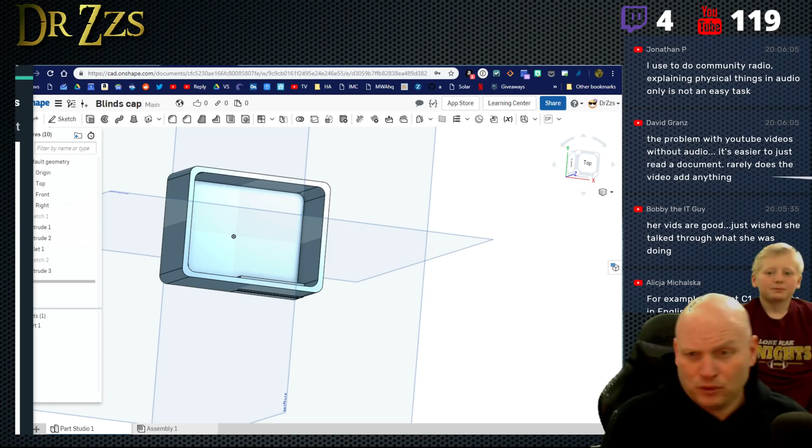All right, is Mama home yet? Mama's not home yet, huh? Wow, she's coming late. How was your movie, girls? Good, good, it was so much fun. Did you love it? Okay. Yeah. Oh, I'm gonna get to watch it with you soon. Where are you at, Dee?

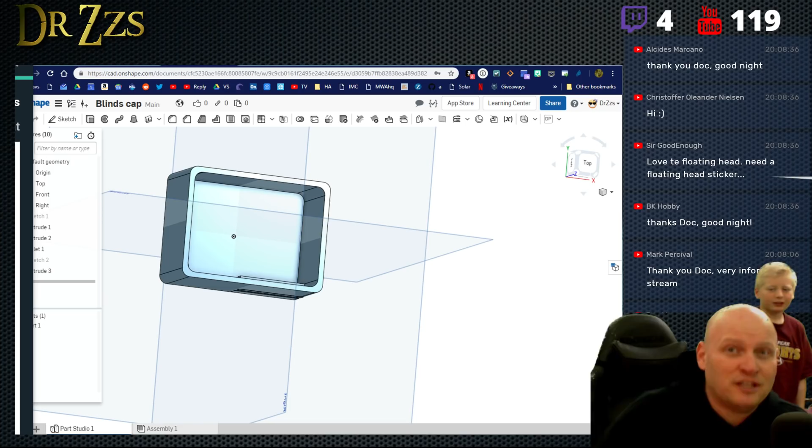Dad, I can't walk. You can't walk.